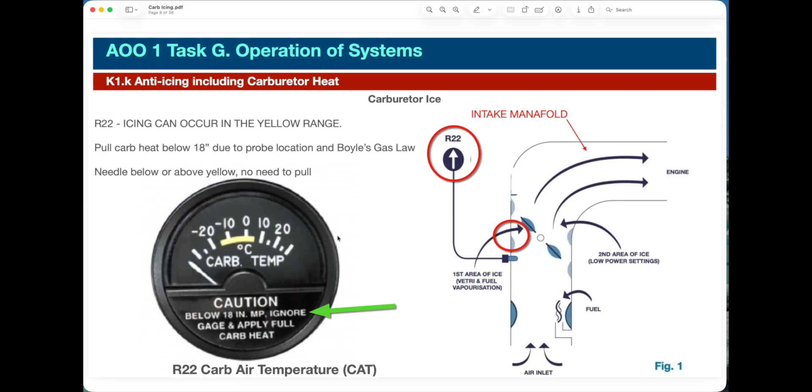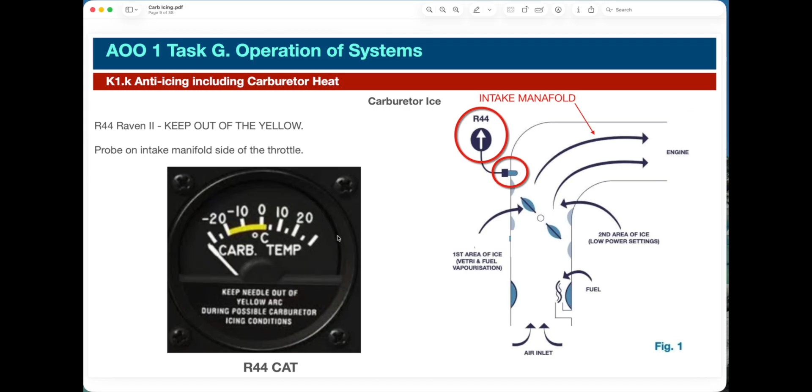I get into an R44 in exactly the same conditions, and I can't get the R44 engine to stop, mainly due to the R44 being cowled. The engine is cowled, so the carburetor gets some heat soak and benefits from that temperature. So make sure the carb heat temperature gauge is accurate prior to takeoff, and then keep it in flight. If you're in conditions conducive to carb icing, have about 15 degrees indicated during that flight.

Back to you, John. Awesome.

On there. Great. Yep. Thanks.

Yeah, that's really interesting. So do you find that the conditions that we learn for carb icing, these conditions are pretty accurate? If we find that we're in this between 27 and -4 degrees with high humidity, is that an accurate representation of where carb icing really happens? Yeah, it is pretty accurate.

The only thing you have to understand about the graph is the graph is designed and was built for a standard generic carburetor icing situation. The fundamental issue that you have flying a 22 and a 44 is that you're flying a derated engine. Yes. So therefore, the butterfly valve is in a completely different place compared to how they produce this chart. Got it. So you're more prone. 22 and 44, you're more prone. So you need to use a little bit of caution on this chart.

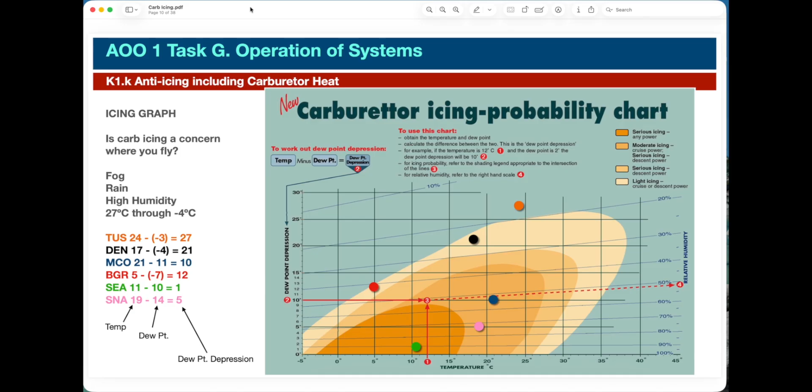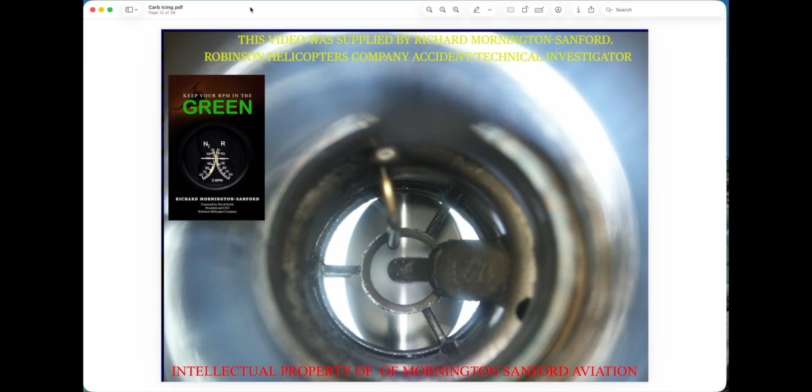Copy. So do you want to talk to us about butterfly angle versus manifold pressure, or should we go through some of your slides here on actually seeing carburetor icing in action? Well, do you want to show them carburetor icing first? And I'll go back to that chart. Great. I think it makes more sense that way around, yeah. Great. Now, if I move this quickly, it almost looks like a video. It's kind of frame by frame, but I'm just going to start pushing through it, Richard, and you stop me or tell me what was going on as we move it. How's that sound? Yeah, that's fine.

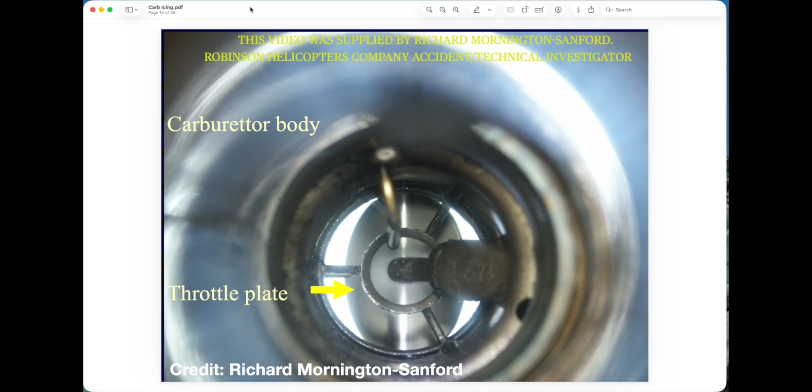So to get this, we had a camera mounted on the airbox looking up at the fuel jet and the Venturi. Great. So here's our carburetor body, our throttle plate, that's our butterfly, and here's our Venturi. Yeah. And this is where ice begins to form. And so this is what's really exciting for everybody here. I think you guys are going to love this. We actually get to see this happening.

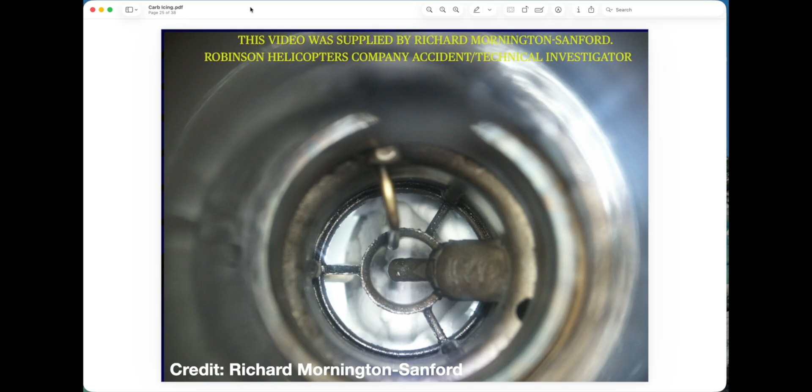So that's a considerable amount of ice. And that's on the Venturi side, the downwind side. That's exactly right. Yeah. And that will stop your engine if you allow that to happen. Yeah. That's pretty substantial. It is, yeah.

Now here on the intake manifold side, which is on the side of the 22 where the probe is not, but it is on the 44, we can watch this as well. So you can clearly see there's very little area there that allows air to pass that snowball. Yeah, those are pretty substantial. Yeah. Now, even if you had a smaller amount of this ice on that carburetor butterfly valve, if you don't clear that prior to reducing the power, then your engine will stop. I've had it stopped on me several times, so I can tell you from experience, it will stop on you.

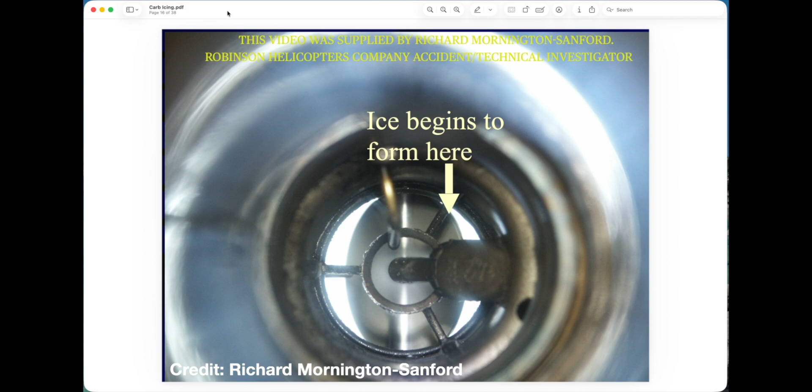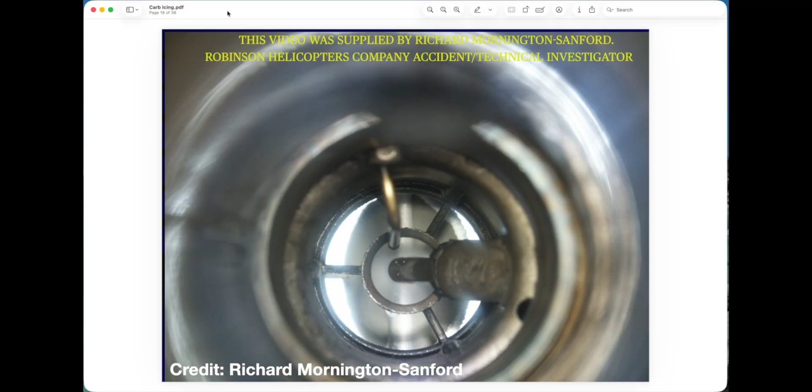Well, this is outstanding footage. Maybe you can explain a little bit what Frank mentioned regarding why this is not as much of a concern in a fixed wing, direct driven airplane with a similar engine and a prop. Yeah, well, there are two issues there that we need to look at. One is the question, why can I use partial carb heat in a helicopter and I can't do so in a fixed wing?

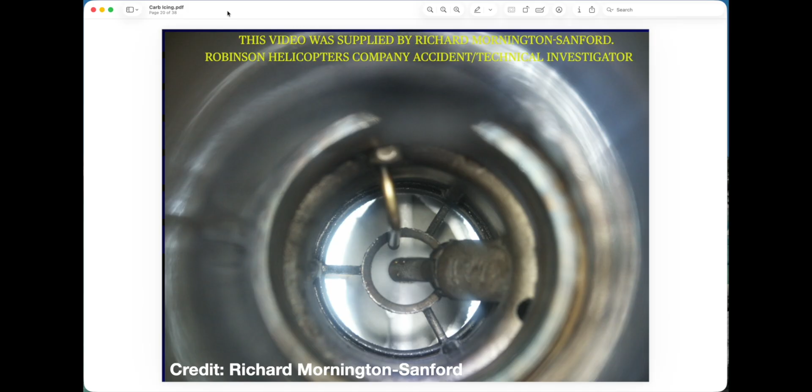And the answer is simply that in a helicopter, we have a gauge that allows you to see the temperature inside the carburetor. Whether it's in the right place or the wrong place is irrelevant. I can still see the temperature inside the carburetor. Airplanes generally do not have the gauge, so they are advised that it's either fully hot or fully cold. That is the main reason why we can do both. Sorry, what was your other question, John?

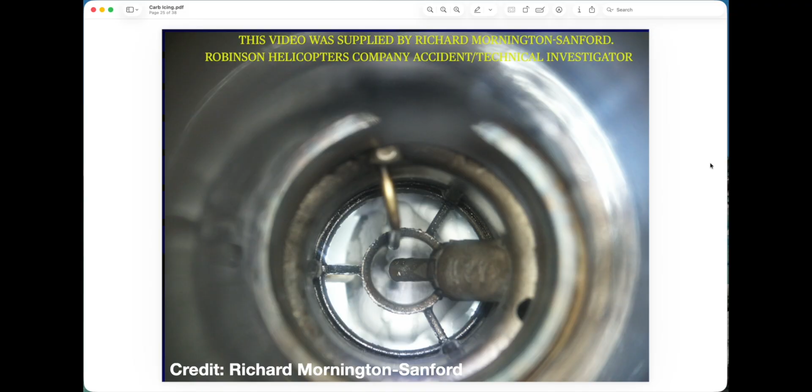Real quick, Richard, I got Jay over here on the chat. I got some questions. I'm going to go ahead and acknowledge Jay Bunning from Bend, Oregon. Jay, if you can go ahead and unmute yourself and ask your question. There you go. Come on in.

Good morning, Richard. So I was asking if you recall when you recorded those videos, was that at idle RPM or flight RPM, and what kind of manifold pressure you were indicating for that test? Yeah, that's a good question. On that particular test, that was a bench test.

Well, the initial part is the bench test where we had the camera in the airbox. Now, obviously, I did all this during flight. I did a complete test flight on this, but we couldn't put the camera on the downstream side, so we couldn't see that in flight. But the test bench was based on information I got during the flight test, and that was 18 inches of manifold pressure, if I remember correctly.

So you can see, if you're a light pilot with half a tank of fuel, you're most probably cruising around 18 inches of manifold pressure. And if you don't use sufficient carb heat, that's what's going to happen to you. And was that a Beta 2 engine? That was a Beta. So the problem is even worse with a Beta 2, like you said. Absolutely, it is. Absolutely, as we're going to see on the graph shortly.

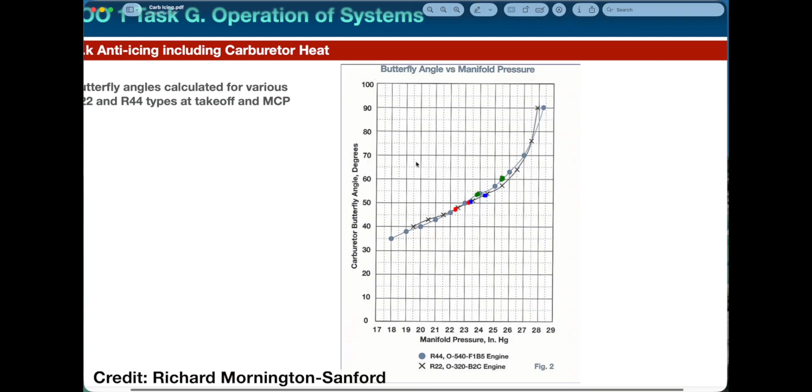Okay, so I produced this graph because I did a presentation to the UK CAA many years ago. So we've got three colors on there: green, blue, and red. So the green is the R44. So that's the R44 at takeoff power. You have that green there. So the butterfly valve angle is 60 degrees.

Now, the interesting thing here is that if you read Lycoming's information on carburetor icing, they say carburetor icing is negligible at takeoff power. And what they mean is takeoff power in a fixed wing where you're full throttle. So the butterfly valve is pretty much 90 degrees. So I would agree with them that in that condition, carb icing is negligible. But of course, with us, we have a derated engine, and it is a real issue even at takeoff if you're in conditions that are conducive to carb icing.

So on my R44 Astro Raven 1 carbureted R44 at takeoff power, so 225 brake horsepower, the angle is about 60 degrees. At MCP, you can see it's about 54 degrees. Okay, now the blue is a Beta. So that first mark there, that's your 131 brake horsepower. So that is an angle of about 54 degrees. And at MCP, you're at 50 degrees.

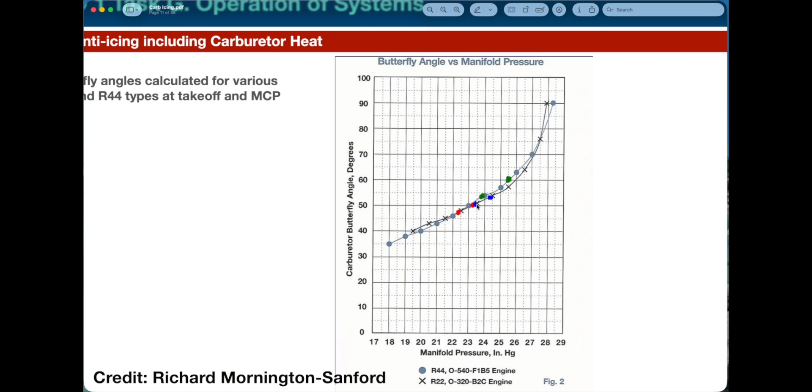Now we get to the real issue, because most aircraft out there tend to be Beta 2s. And so if I look at the first red dot, that is 131 brake horsepower at 50 degrees butterfly valve angle. And my MCP is about 47 degrees. Yeah, which is, if you're flying around and not using carb heat correctly, then in conditions that are conducive to carburetor icing, you are definitely going to get ice occurring in that carburetor.

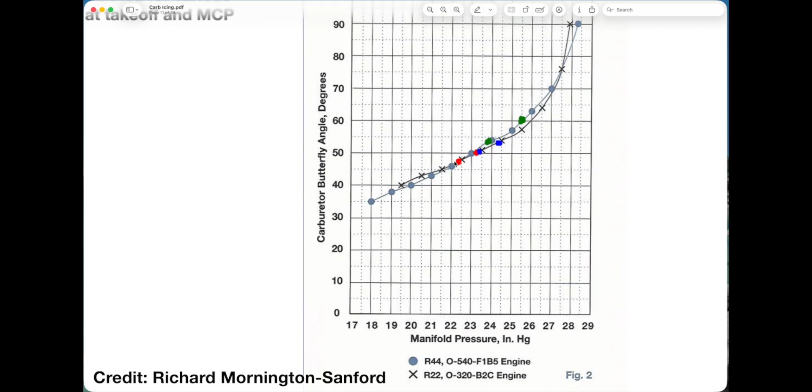So the rule has to be that one has to assume that for whatever reason, I have got some ice in my carburetor. And therefore, when I want to make a reduction in my power, I want to pull full carb heat about 20 to 30 seconds prior to lowering that collective lever. That will make sure that you clear out the ice before you reduce the power.

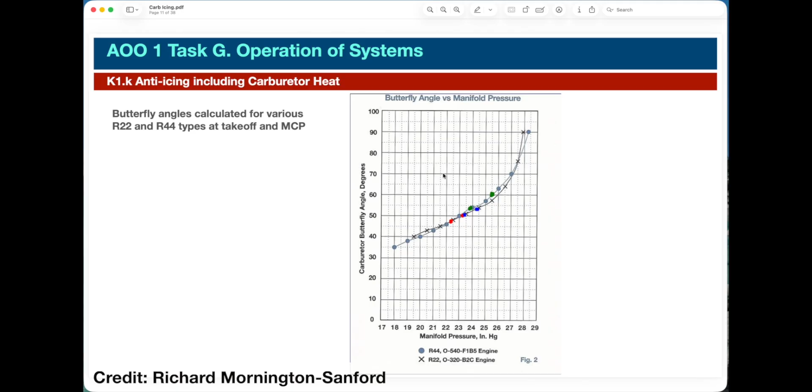Now, one of the issues that we have is that if you have ice in the carburetor and you lower the lever and the engine starts to run rough, and then you pull full carb heat, because the ice is melting and going into the induction system, the engine is actually going to run rougher. So it feels and sounds like the wrong decision. So very often people will push the carb heat back into fully cold. And then unfortunately, that's the problem where your engine will eventually stop on you.

So you have to understand that depending on what you have already allowed to build up in the carburetor itself, the worse it's going to run rough before it smooths out after you've cleared out the ice. Yeah, so back to you, John.

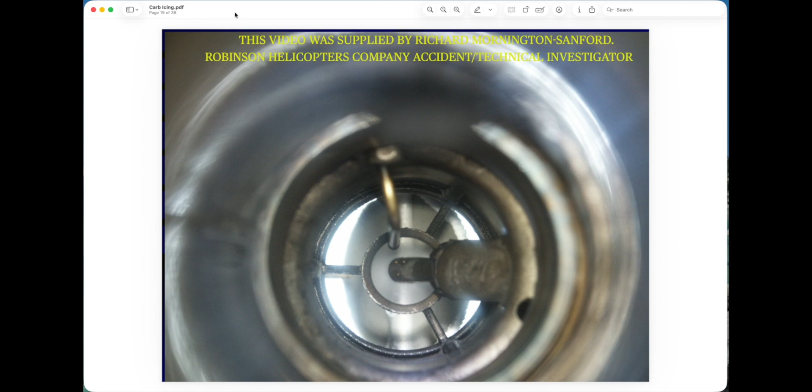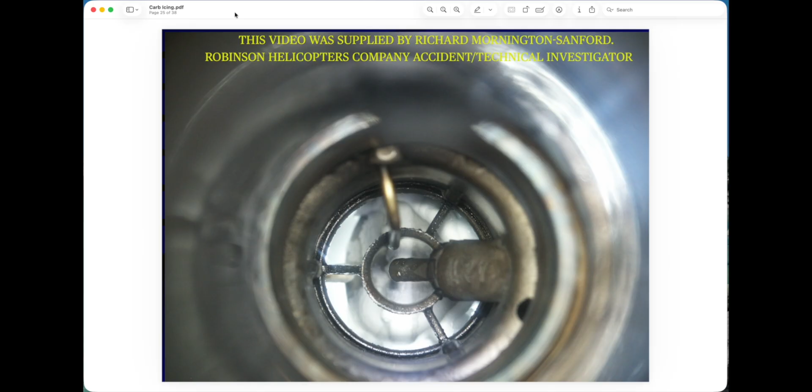Great. All right, guys. I think we are pretty much at the time where the 1 hour, I guess, goes away. Don't we have 20 minutes, Jay? I thought so too, but for some reason my timer is reading 106. Well, we got started a little early, I guess. Yeah, we started at 25 after, so it's giving me the warnings. Just in case we drop out. Okay. It's okay. The warning that I was giving everybody.

Obviously, if we can maybe take a few more topics, but just be careful, because if we do drop out, apologies to everybody. It's a Teams meeting, and we're not upgraded yet. We're not making the budget yet. This is the right price. So, all right, guys, keep it going until we get knocked off, I guess.

Sounds good. Okay, do you want me to go through this? So basically, yeah. The technical document that I produced many, many years ago, which the FAA are now kindly using, No Ice Thank You, was generated due to an accident over in Switzerland. And I took about 3 years assembling this document. And the fact is that if I apply carb heat, I change the density altitude of the engine. So therefore, what I've calculated on my manifold pressure chart no longer applies.

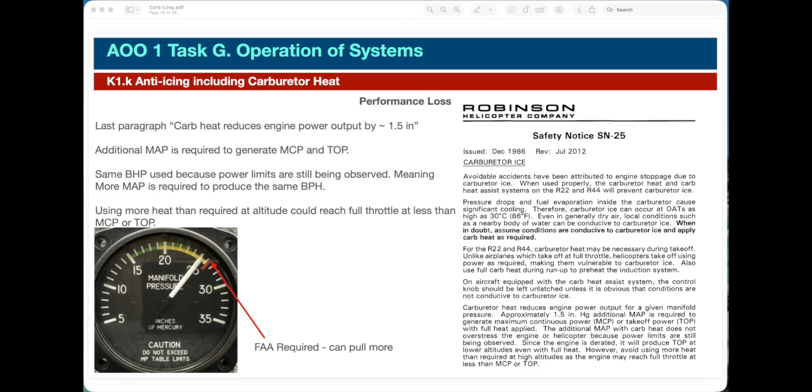Okay, in my document, I will tell you that given if I use full carb heat, then I can use X amount more inches of manifold pressure in order to achieve the same horsepower. You have to remember, the limit on this aircraft is horsepower, not necessarily placarded manifold pressure. Placarded manifold pressure only works and becomes a limit if actually those conditions are correct and don't change. Well, with carburetor icing, of course, they do change.

So you must be aware that I can actually pull more power with carb heat applied than I have calculated on the graph, and I am not exceeding the limit of the engine or the aircraft drivetrain. Right. So because we are derated, that means we can pull a little bit more, but we could get into a scenario where we're reaching full throttle. Correct. Yes, without doubt.

This is from Jay at Leading Edge. This is what they use there for full throttle limits in their helicopters, their 22s in Oregon at high DAs. The red line is the full throttle rule of thumb. Yeah, okay, so it's well on the safe side of things, by the looks of it.

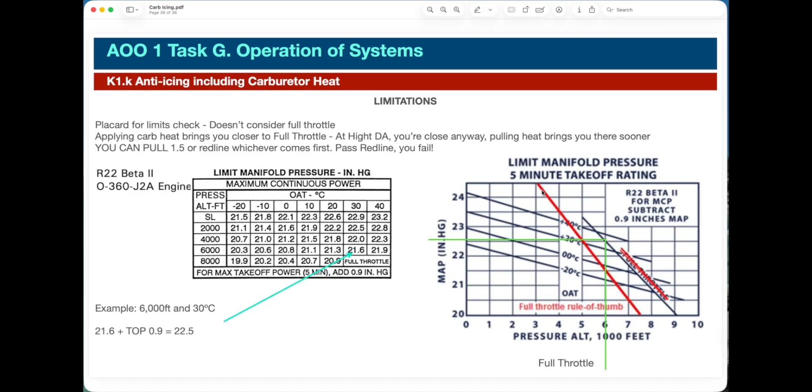Without a full throttle light, and our aircraft don't have that, if you're just pulling the collective up thinking you got that 1.5 inches, it's going to bite you. Yeah. Okay, I agree with that.

Let me just explain a little bit what we do in the UK, Jay. Obviously we've got carb heat applied during the cruise, subject to the conditions that we're flying in. But what we tend to do is pull full carb heat prior to reducing the power from the engine. But at about 300 feet, we put the carb heat back into what we had pre-selected. Okay, so that's not full carb heat. Or, depending on your conditions, you can put it back into fully cold.

If your requirement is power at that point, which it sounds like it is, you can put it back into fully cold, because you have to understand that because you've been using full carb heat during the approach, the carburetor has heat soak. So if you put the carb heat back into fully cold, it isn't going to ice up on you. And anyway, the butterfly valve is now moving in the correct direction. So the chances of you getting carburetor icing in those conditions, I would say, are negligible. Your issue, as you quite rightly said, is power. Low RPM.

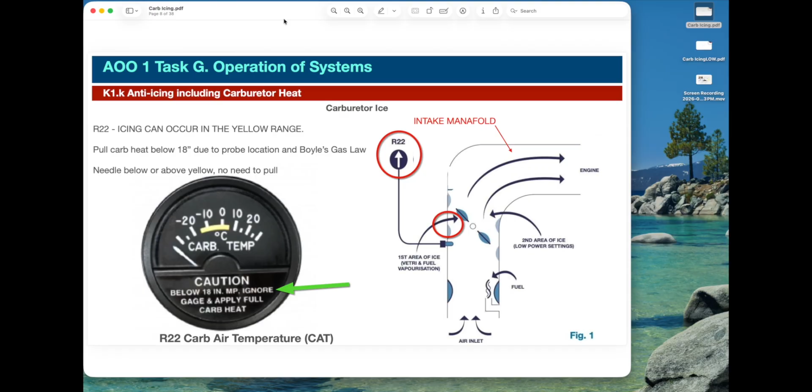Here. Yeah, that drop in temperature on the upstream side of the butterfly valve, where the CAT is for the R22. That drop in temperature there, say due to the Venturi and atomizing the fuel, is 20 to 30 degrees change in the incoming air temperature. Yeah, that's a reduction. That's substantial. Yeah, it is. Yeah, absolutely.

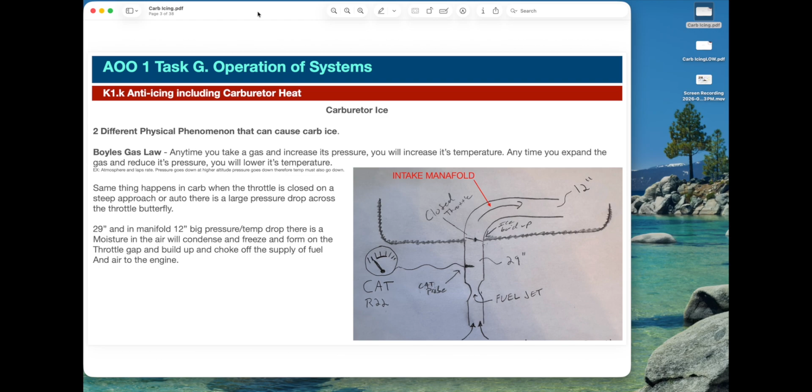Yeah. So any moisture you have there is, and of course we haven't talked about the lock on the carb heat assist, and of course that's there because there are atmospheric conditions, which I think generally is accepted. Sort of, if you get to -6 degrees C.

You have this funny Fahrenheit thing. How did you end up using Fahrenheit? I have no idea. I don't know. No, it has nothing to do with our relationship.

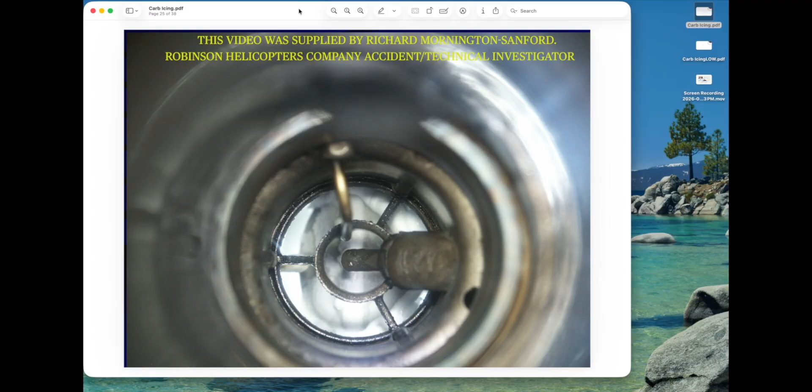At -6 degrees C, any moisture in the air is already an ice crystal. So you don't want the carb heat assist melting it and then it refreezing on your carburetor. So you'd lock it off. That's the reason for the lock. Yeah. Well, this is fascinating footage right here of this icing. Yeah. And I say it did the same in flight. Yeah. But we set that at MCP, and sometimes they're less than that depending on the person flying, the weight, the all-up weight of the aircraft.

Yeah. Richard, I'm intrigued about that testing. Were you doing circuits near a surface to do a fall down, or were you in a hover, or how did you actually set up? I did everything. So I did a full flight program in the hover, over wet grass, over wet tarmac. It wasn't tarmac, sorry, it's concrete. In the climb, in the cruise, in descent. It was a full unofficial flight test of an unofficial modification. So it was experimental, but it proved just how good this is. And we had to prove that.

I'm quite happy starting engines in flight. I don't have a problem with them. But obviously I make sure that I'm not below a certain height, so that I've got the time to restart it. I might be crazy, but I'm not that crazy.